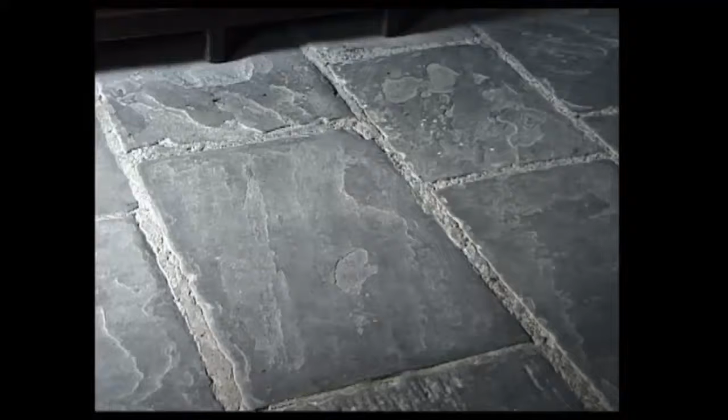These ironworkers' cottages were built more than 200 years ago. Crude by modern standards, with 2 tiny bedrooms and a shared outside earth closet, these houses were quite comfortable for the time. The ground floor was made from stone flags, or sometimes clay tiles, laid directly over levelled and compacted earth. Carpets were virtually non-existent, and people made do with homemade rugs and matting. Stone flags and clay tiles were easy to clean and didn't suffer much if they got wet. They were, however, cold and had an uneven surface.

These middle-class townhouses were built about the same time. Most of these had basements, again with stone flag or clay tile floors.

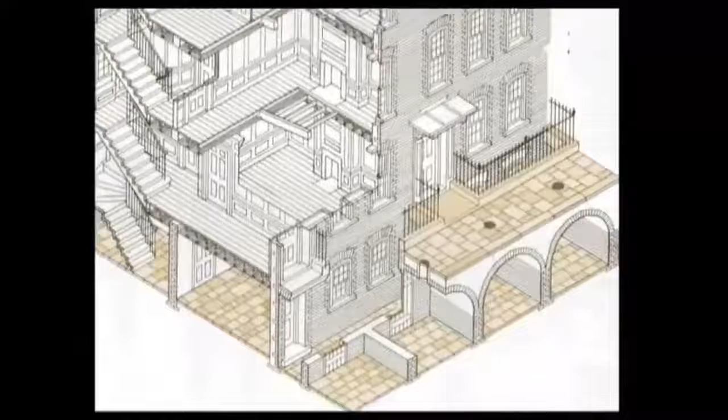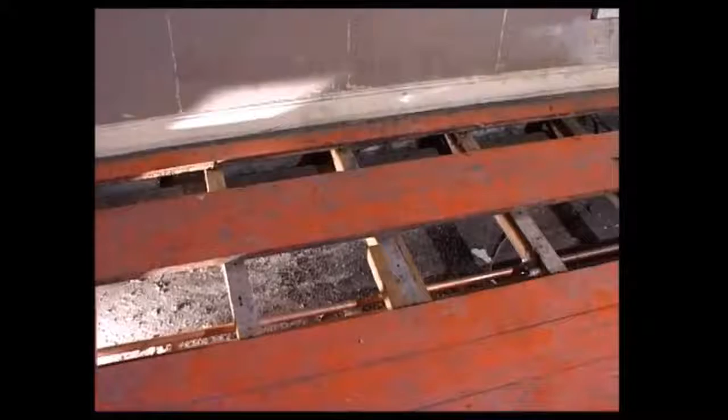Towards the end of the 19th century, the standard of working-class housing slowly improved as planning controls and building acts became more stringent. In addition, cheap imported softwood became readily available. And by the early 1900s, most new houses were being built with timber ground floors. Timber floors were warmer and drier than flagstones and a much better surface for carpets and linoleum.

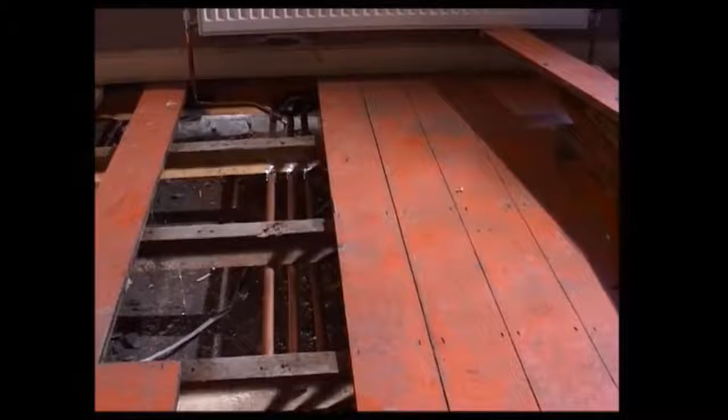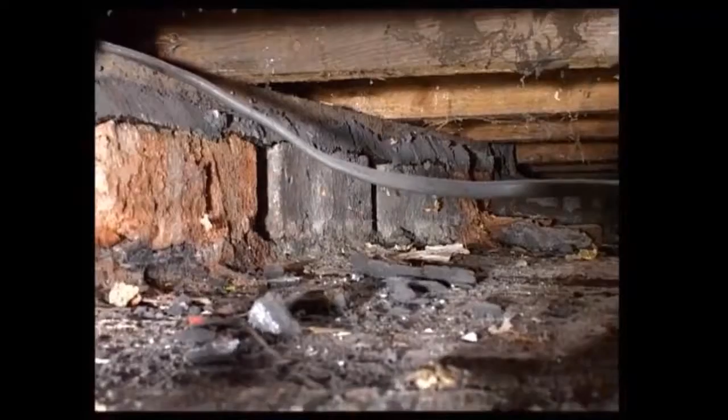Timber floors consist of a series of timber joists covered with timber boards. The floor is not in direct contact with the ground and is often referred to as a raised timber or suspended floor. In a typical floor from about 1900, the joist ends were usually built into the solid external walls for support.

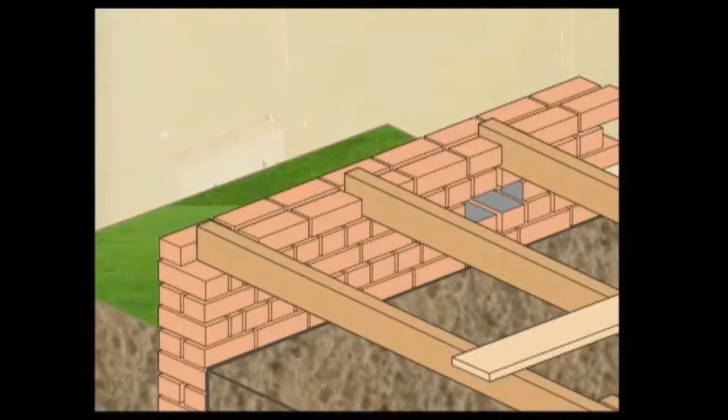To keep joist depth to a minimum and to preclude the need for long, expensive timbers, additional support was provided by intermediate walls called sleeper walls. These could be built from brick or stone and were sometimes honeycombed to help ventilation of the floor void. A strip of timber known as a wall plate provided a level surface and a good fixing for the joists. Sleeper walls were sometimes built straight off the ground or on shallow foundations. Ideally, the ground level below the floor should be higher than outside to prevent the risk of ponding and flooding.

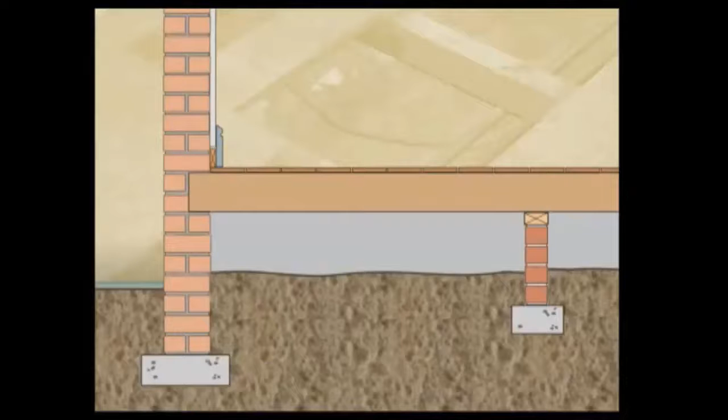The joist ends were susceptible to penetrating damp because in most cases they were only protected by half the thickness of the wall. The lack of effective damp-proof courses meant that joist ends and wall plates were also susceptible to rising damp. The bare earth or rubble infill beneath the floor was often permanently damp, and to prevent conditions which could lead to rot, the floor was ventilated.

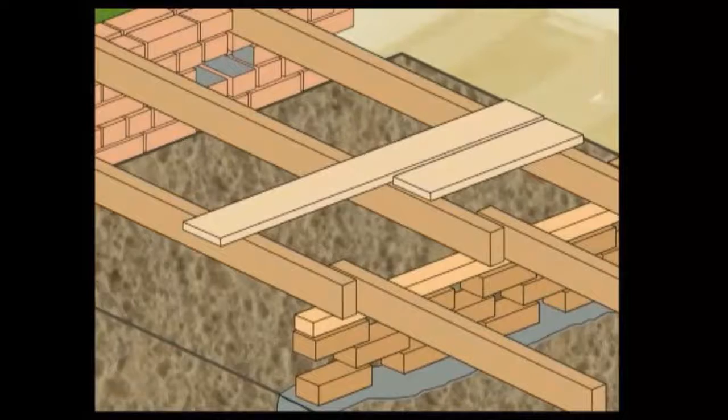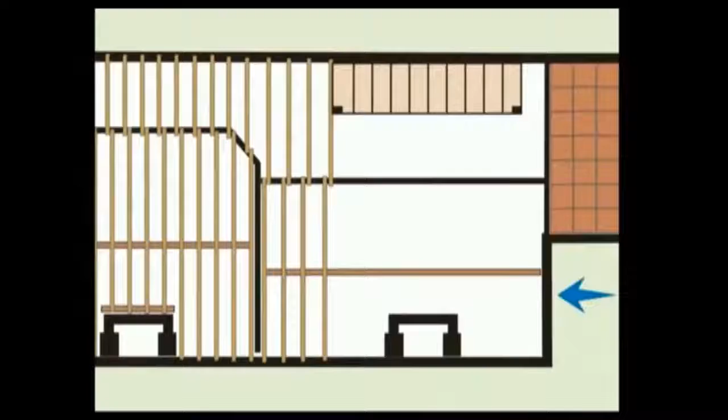Terracotta or cast iron vents allow air to flow beneath the floor in an attempt to keep the underfloor space dry. In many houses, there aren't enough vents to do this successfully. A typical terraced house might have 2 or 3 vents at the front, but only 1 at the back. Ventilation at the rear of the property was often restricted because the scullery, where the washing would be done, usually had a flagged solid floor.

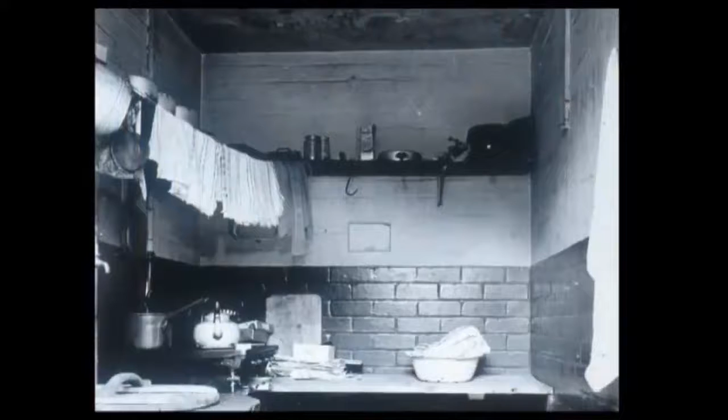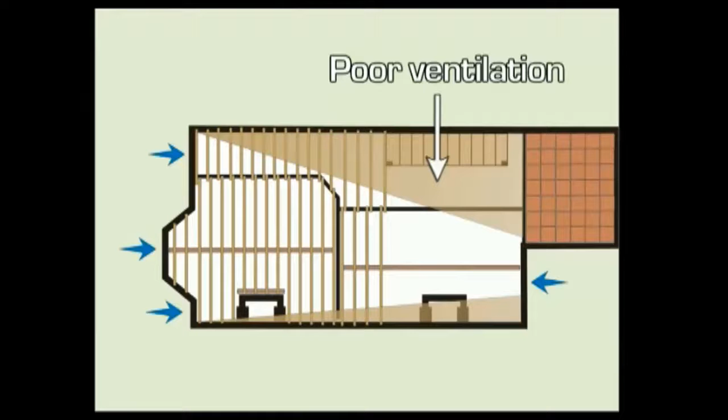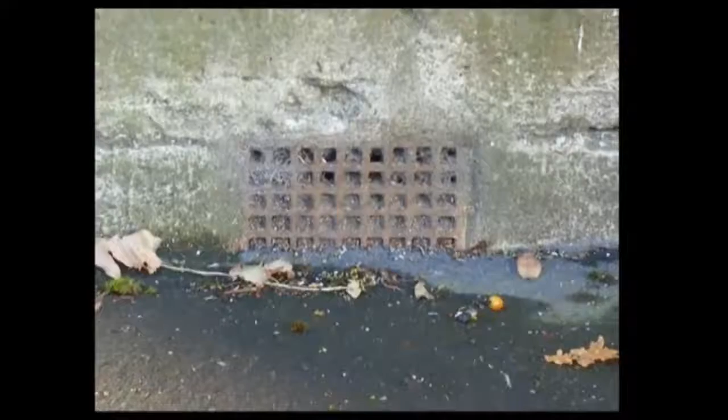This meant that a large part of the floor void, usually along the party walls and under the stairs, was poorly ventilated. When surveying old houses, these areas require careful inspection. In some houses, clay pipes laid under the scullery floor provided a through flow of air and better ventilation. Even if there are enough vents, problems can still occur if vents become blocked or if garden or paving levels change. In some cases, the vents are so low that water from paths can actually run into the floor void.

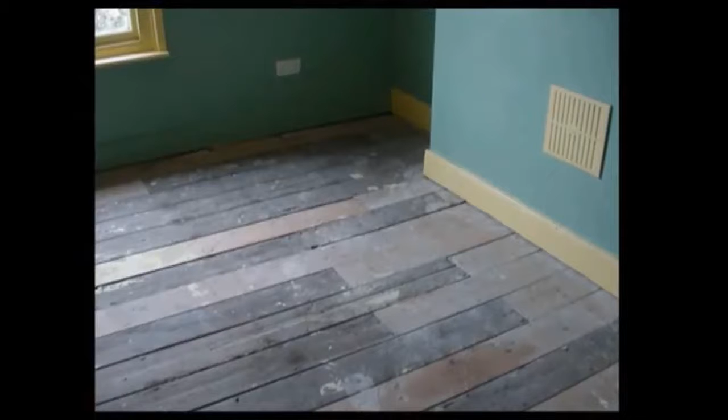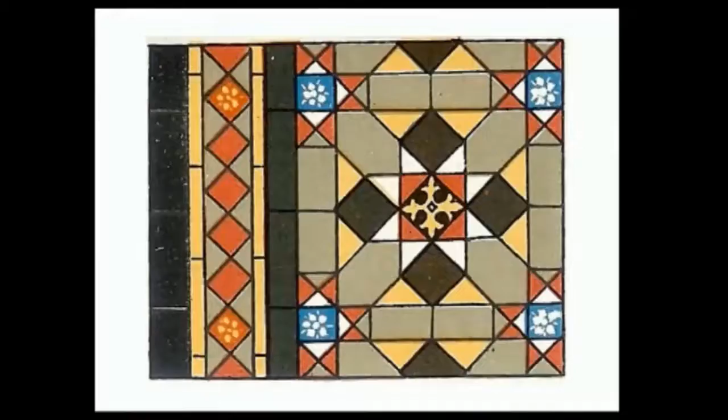In most Victorian houses, the joists were covered with square-edged softwood floorboards. Over the years, as the timbers naturally dried, the boards would shrink and twist. This could damage floor coverings, and the unsightly gaps between the boards could make the room drafty. In some houses, solid floors weren't just confined to the scullery. In better quality housing, the hall floor was often a solid concrete slab laid directly on the ground and finished with decorative tiling. A tiled floor provided a very durable finish. It also signalled prosperity and good taste to all who walked over it.

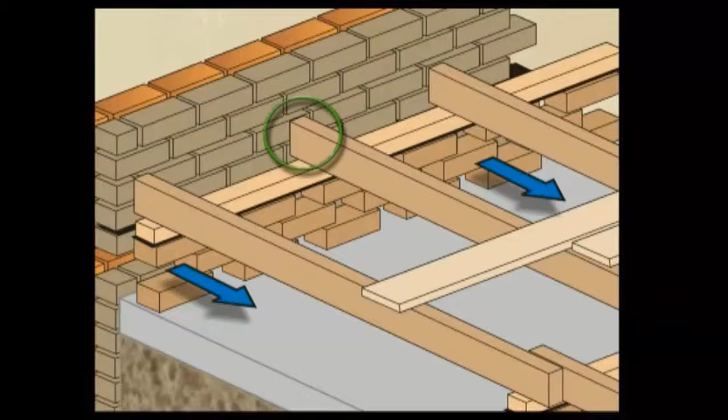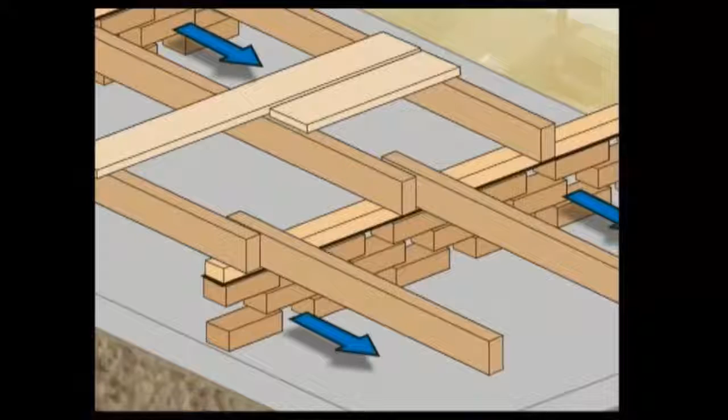The raised timber floor was used in millions of late Victorian and Edwardian houses. Improved building standards in the years after the First World War did, however, lead to changes in the way that these floors were constructed. No longer were joists built into external walls. By keeping the joists clear of the wall, risks of penetrating damp were avoided. Risks of rising damp were reduced by the introduction of effective damp-proof courses. Additional protection was provided by forming a concrete slab over the bare earth. This helped to keep the underfloor space dry.

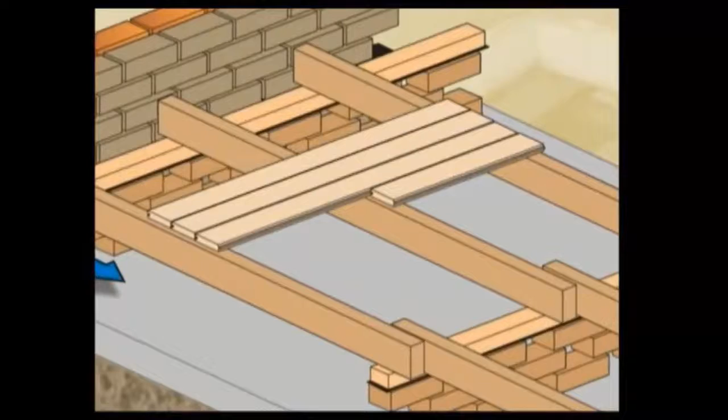Many of these houses had tongued and grooved rather than square-edged floorboards. The interlock in tongued and grooved boards reduces twisting and eliminates drafts. They are, however, not as easy to lift for maintenance purposes.

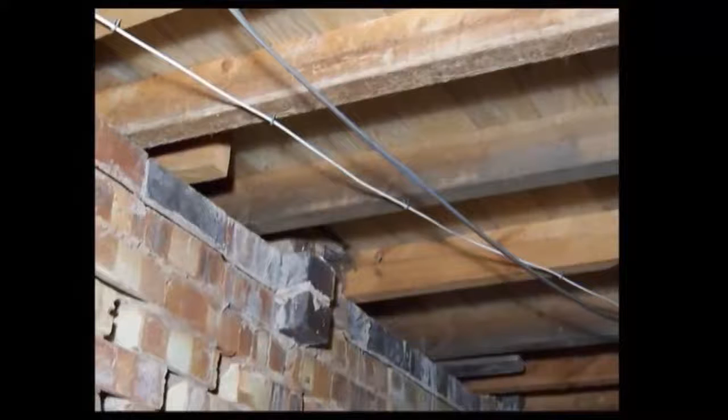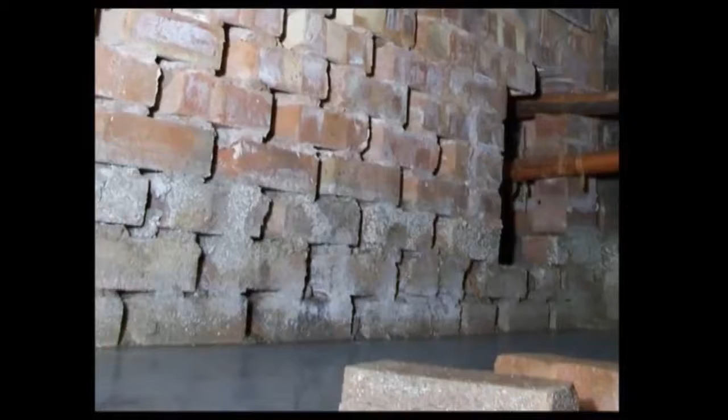In the 1960s, timber floors were still popular. This example may not be textbook construction, but it hasn't given rise to any problems in more than 40 years. There's no wall plate, which is unusual. The joists sit directly on a course of engineering bricks laid on a bitumen felt DPC. The sleeper walls, however, are honeycombed to help cross-ventilation. Ground level below the floor is quite a bit lower than the surrounding garden. After long periods of heavy rain, water finds its way into the void. The tide mark shows just how deep it can get.

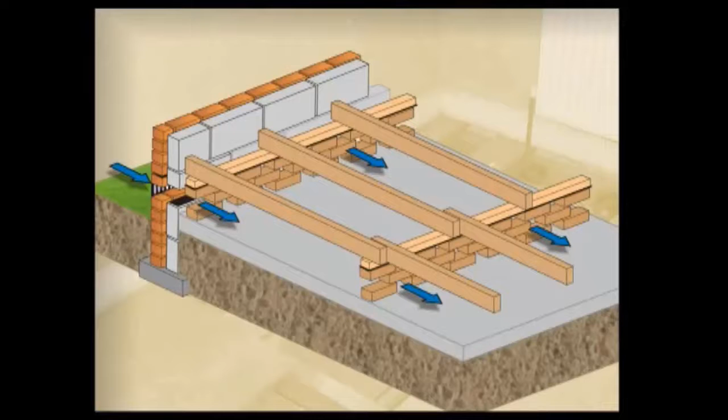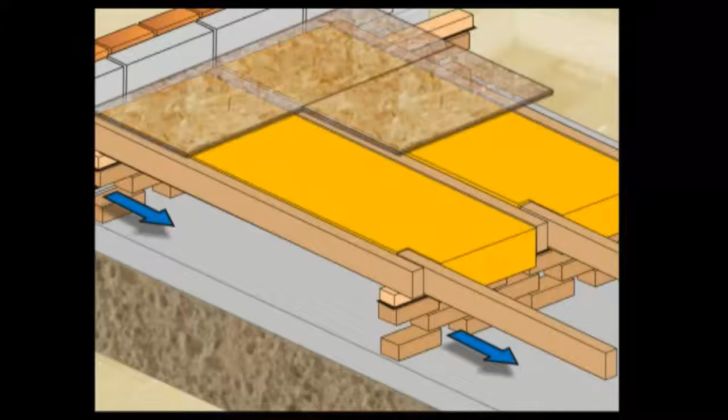Timber ground floors are not very common in modern construction, but they are quite acceptable. Unlike their earlier counterparts, modern floors are insulated against heat loss and are normally finished with sheet materials such as chipboard or strand board. In addition, the building regulations are more rigorous in terms of underfloor ventilation.

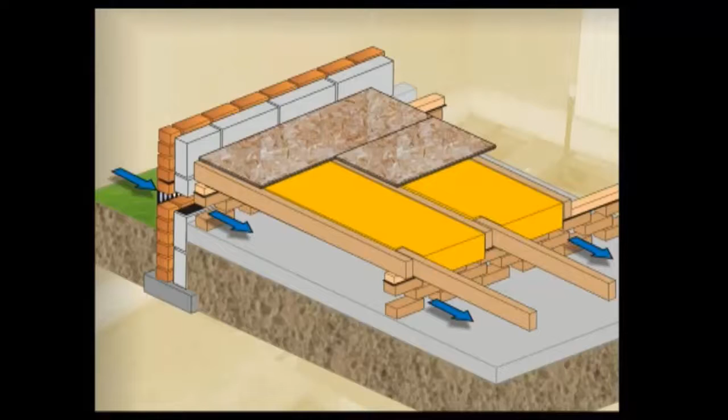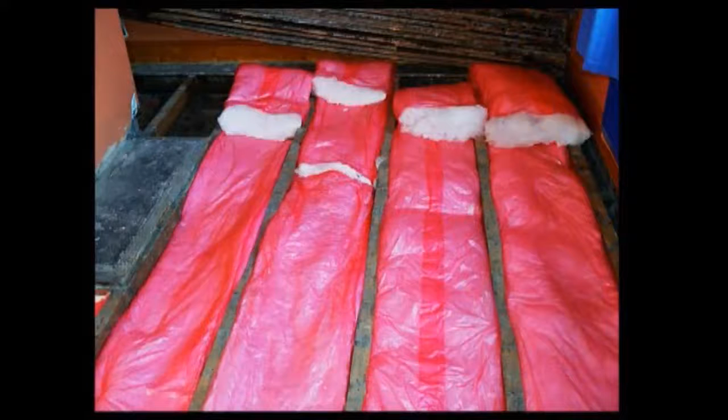Insulating older floors is quite easy and certainly cost-effective. The floorboards on this 1920s house have been carefully removed, and an insulating quilt has been suspended between the joists. The glass fibre quilt is wrapped in a vapour-permeable polythene to make it easier and safer to handle. Glass fibre can be a skin irritant.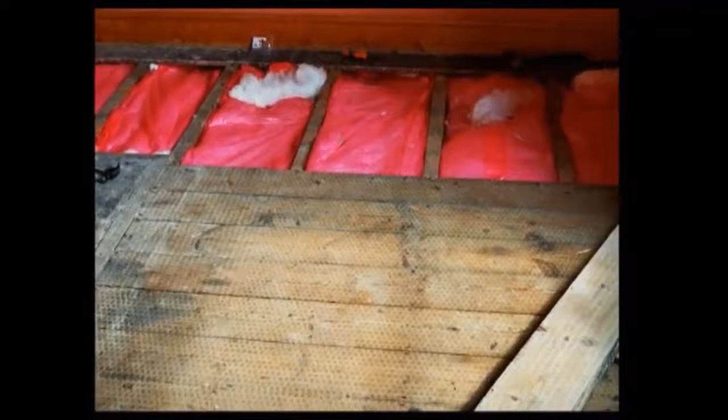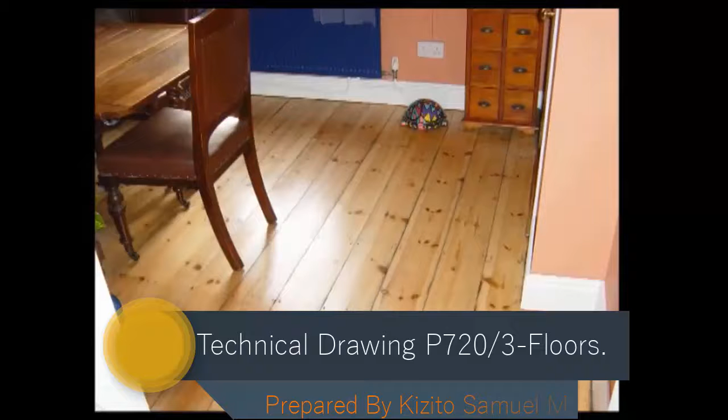When the quilt was complete, the boards were relaid. An extra board was required in each room because the boards were relaid with finer gaps to improve appearance and help reduce drafts. This particular floor was then sanded and varnished. An alternative is to use rigid foam or polystyrene boarding supported on battens. If possible, the edges of the floor should also be insulated to prevent the risk of cold bridging and condensation.